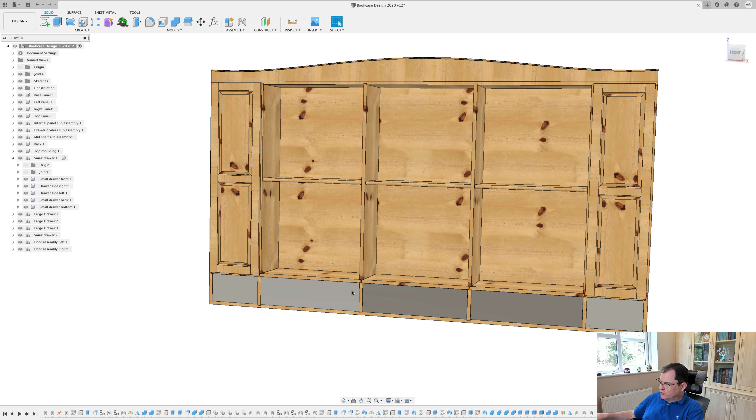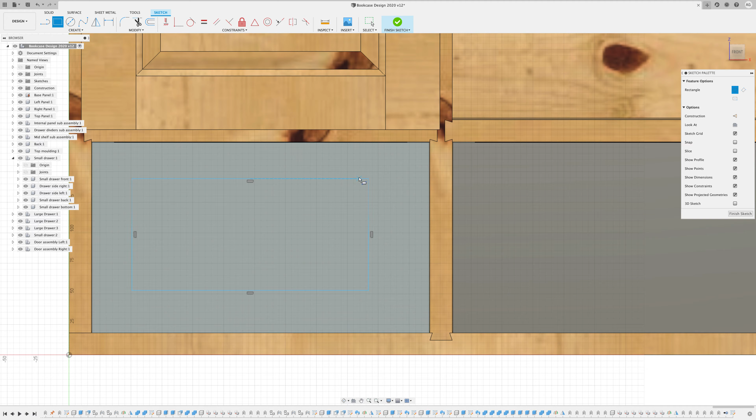So I just want to drop in a drawer front now. That's something we've done before, all the techniques we've certainly done before, so let's see how much you remember. I'm going to come into Sketch, click on the grey area, select a random rectangle, just draw any size like that, and now I want to constrain that to the edge. Now don't forget we put a very small gap around the edge of this drawer, and it's the actual panel on the carcass I want to snap into, not the grey drawer front.

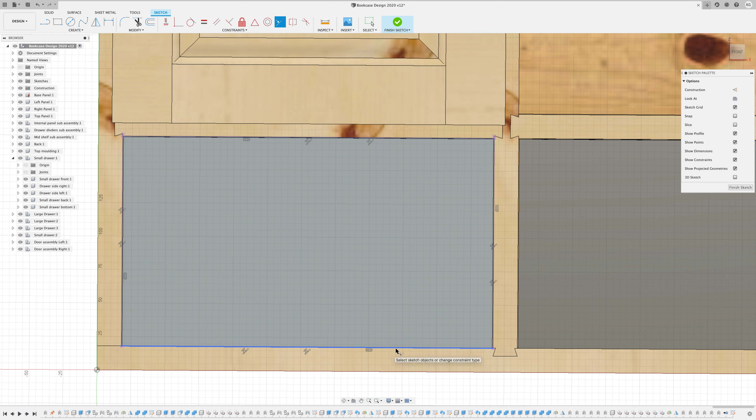Escape out of the sketch, out of the rectangle command, and now come into the constraint. Collinear constraint as always. Take the top edge and take it down to the edge of the carcass. Careful you don't pick up the drawer by mistake. The edge of the carcass there. Left side to the left hand edge of the carcass there. Right hand side to the right hand side of the carcass there. The base to the base of the carcass. Finish the sketch. We now extrude that to make it the right thickness.

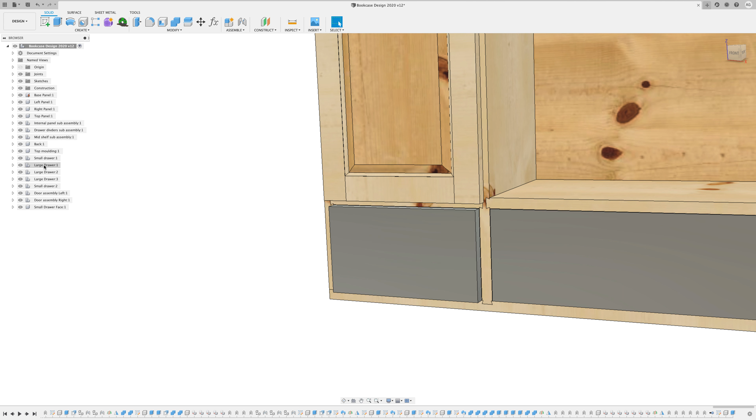So into the extrude tool, click on the front, and drag it out, and we want it to come out by stock thickness. We want to make sure we make a new component there, and let's call this component small drawer face, I think would be good. Let's just check we've not used that name. No, we call it front, so we'll call it small drawer face.

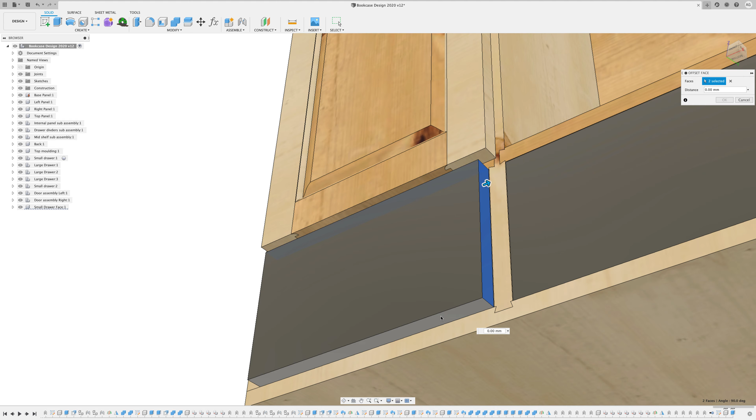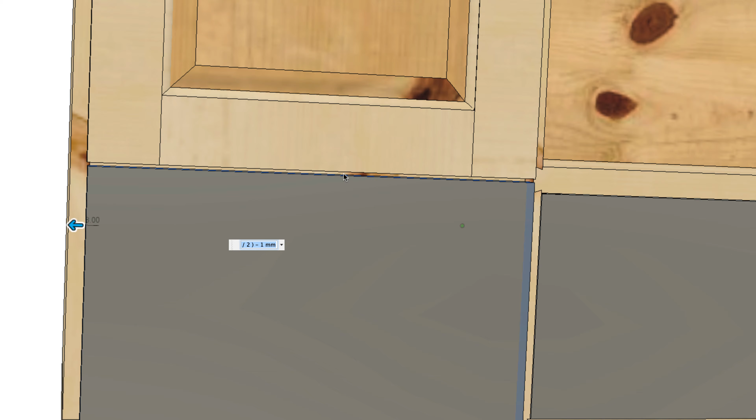Cool. And now we just need to make it the right size. So we need to offset the edges, modify tool, offset faces, and we want this top face, this right hand face, this bottom face, and this left face. And we're going to extrude that out by stock thickness divided by 2 minus 1 millimeter. That's the same command we used on the cupboard door, and you can see that now lines up, but it gives me that nice 2 millimeter gap between the drawer front or the drawer face and the cupboard door, which is what we want.

Now that's obviously not glued onto anything, I can just waggle that round, so we need to glue this to the front of that drawer, so just revert to that position, put it back where it was. Pick up the move tool, move or copy, click on the drawer and just slide that out of the way so we can get some glue behind it.

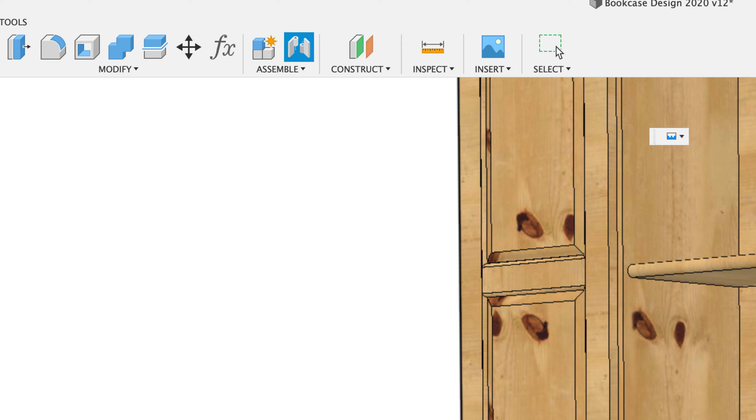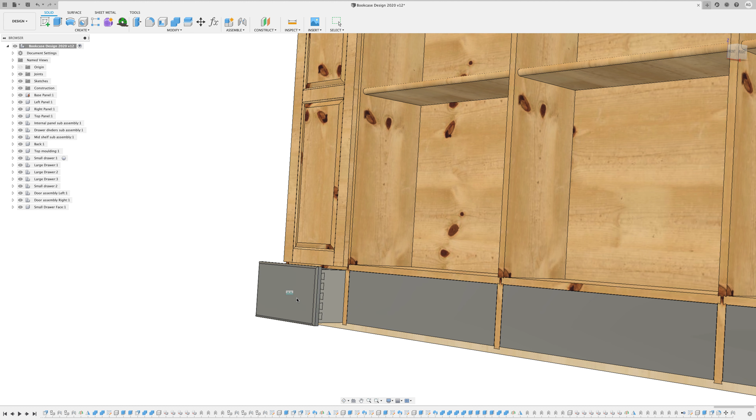Okay. We're going to use a joint assembly to glue things together exactly as we did in the drawers to begin with. So assemble, joint. Now I want to come to the back of this drawer and pick up that back face and the center point of that back face, and I want to glue it to the center point of this drawer sub-assembly. Bang, that will move it into place. I love that. Okay, so that drawer front is now attached to my drawer, so when I drag my drawer front, that drawer slides in and out.

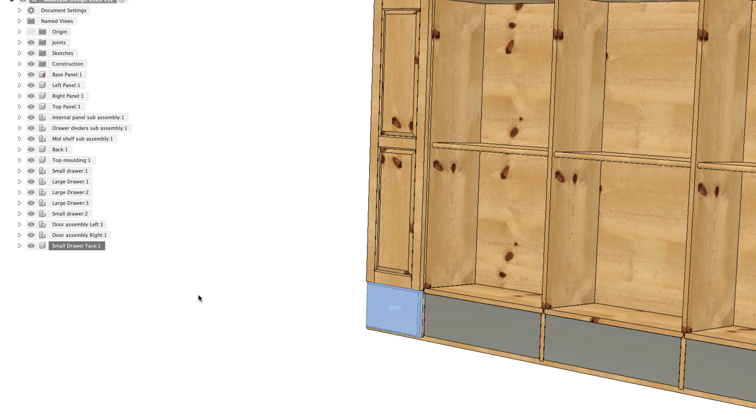Select, position, revert. Okay, so with that done, we can now just copy that over to this side, right click on the small drawer face, copy, right click into white space and just paste new, and that will paste a new drawer face over the old one. I can just move that over here now so it's out of the way. Okay, and now I can glue that into place as well. Assemble, joint.

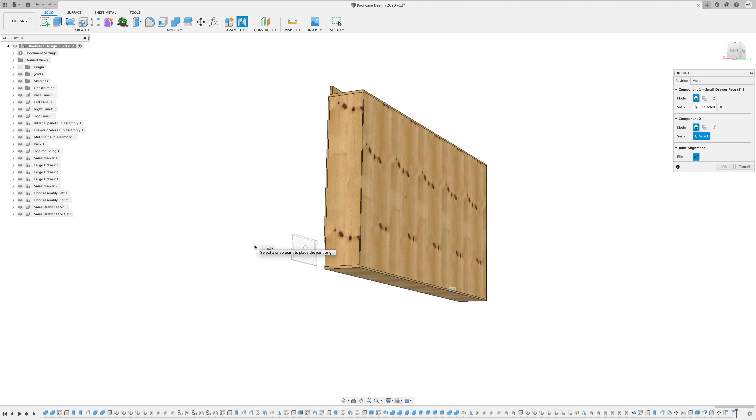It'll tell me I've moved it because I've just moved that panel, so I'll capture that position for now. I want to glue the middle of the back of that panel to the middle of that drawer, into place, shake around, job's good.

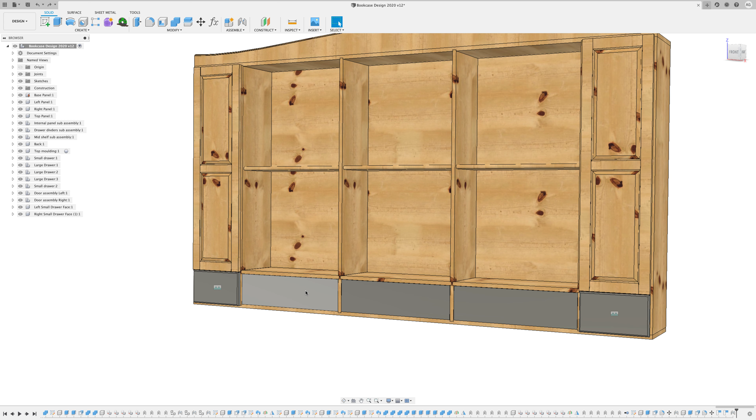So we've now got our two small drawer fronts in place. Now it all seems like a lot of work when you're watching somebody else explain it, but this is quite a quick process. I'm just going to go through this the way I normally would, and you can see what I mean. Sketch, click on the drawer front.

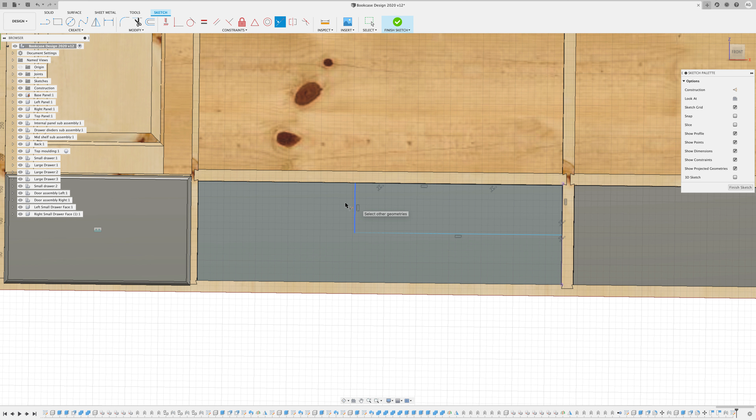Rectangle, random rectangle, zoom in, collinear constraint, top line, top edge, right line, right edge, left line, left edge, bottom, bottom, finish the sketch, extrude, bring that forward, stop, thickness.

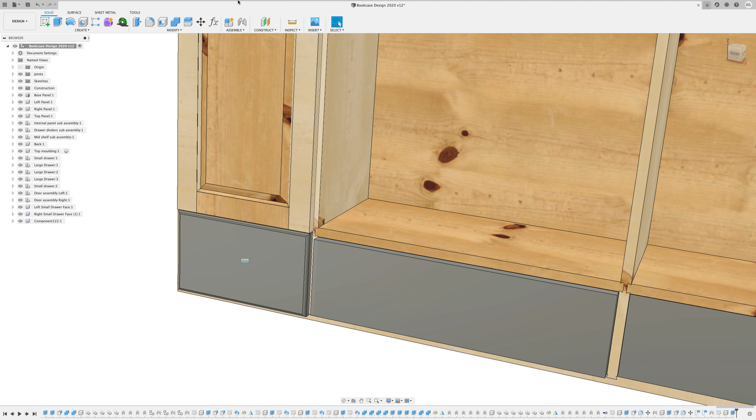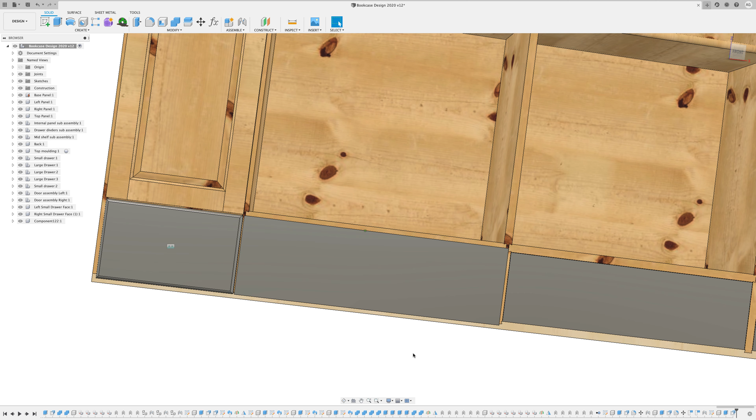Make it a new component. Okay, that's now made a new component on there. Now I just want to put the offset in, modify, offset, that one, that one, that one, that one. I'm going to offset by stock thickness minus 1. Okay, and that's now put in place my drawer front, fillet, front edge, drag it in, joinery, done.

Okay, so I've now got my large drawer front, and that took about 30 or 40 seconds. Give this a name, let's call this large drawer front.

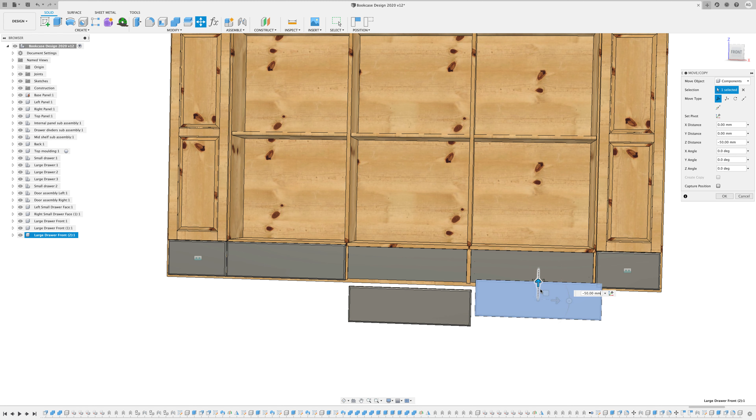Right click, copy, right click, paste new, paste that out of the way, down to there. Okay, right click, paste new, paste that one to there, drag it out of the way. Okay, take the original one, move that out of the way.

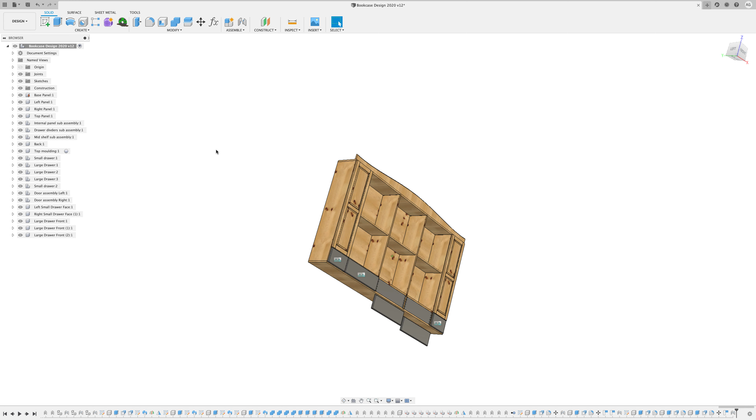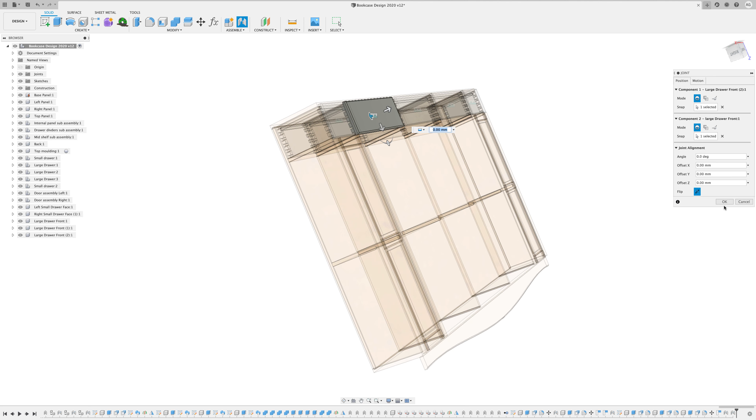Okay, come into the assemble command, joint, capture the positions, click that one to there. Okay, right click, repeat joint, that one, come back to there. Okay, right click, repeat joint, that one to there. Okay, take it home, bang.

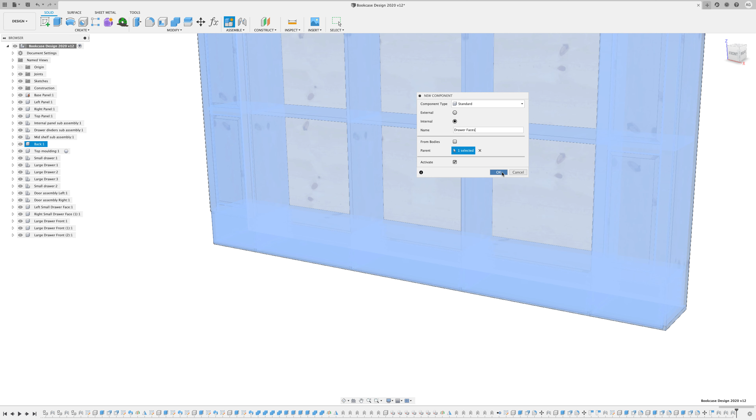So I've now got all of my drawer fronts done. I'm just going to create a new component here. I'm going to call this one drawer faces, because I probably want to work on those separately from the drawer. Okay, and then I want to take all those drawer faces.

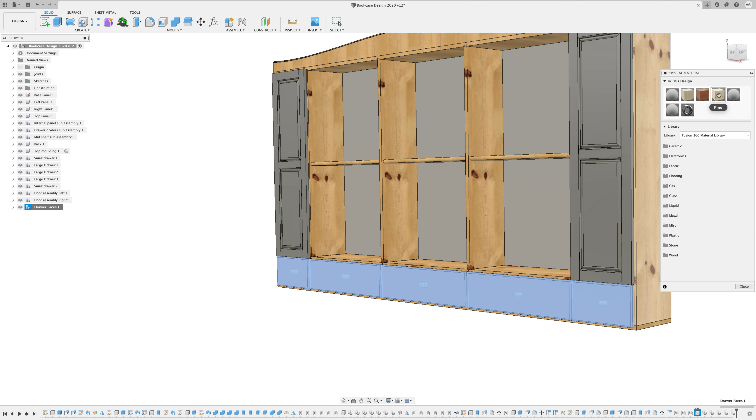Happy days, that's done. Now with that done, we just may as well create the appearance, so I can right click on drawer faces, go to the physical material, and just drag onto that component our pine. Close that down. So we've got our pine drawer fronts done now, as easy and as quick as that.

Now the thing I really want to get to today is introduce you to a new command, and that new command is create revolve. Revolve a sketch profile or planar face around a selected axis. So select a profile or planar face and select the axis to revolve around.

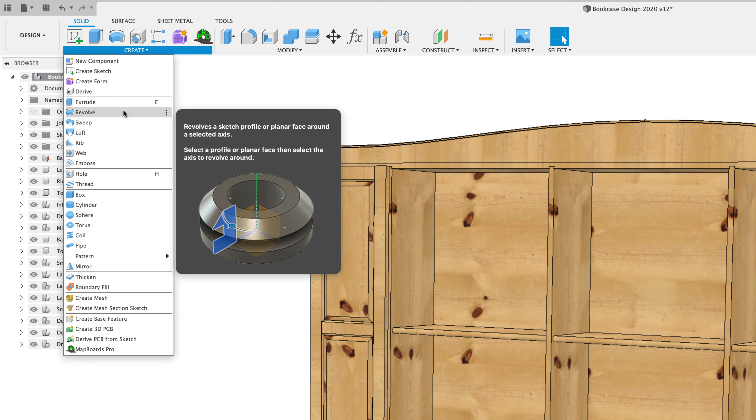And you can see in the example on the diagram, the blue area shows a profile that they drew and then revolved around to make that 3D shape. And that's exactly the technique we're going to use.

Now this is super useful, and if you want to create spheres or any 3D object that's sort of round, you can do that. And if you think about this profile, though I'm not going to model that perfectly, you can see the idea. If you were to sketch that profile out, you could then revolve it and that will give you that 3D shape. So let's look at a very simplistic version of this.

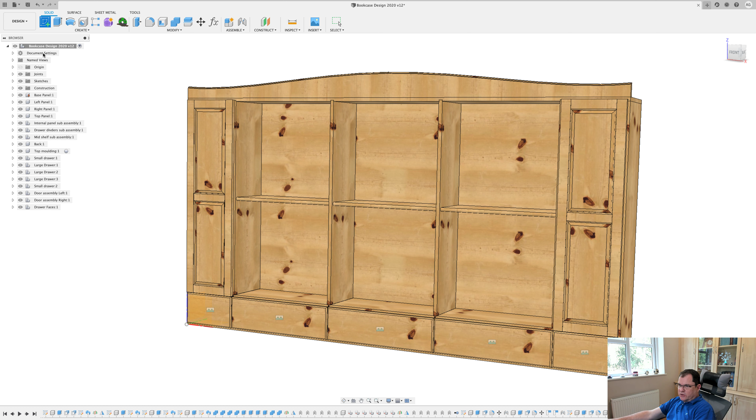We're going to start by creating a sketch. Now I want to create the sketch on this edge plane here, so we're just going to do that. I don't really care about these drawers or anything, I'm just going to sketch anything over here in free space. And I only want to sketch half of the diagram. So I'm going to sketch first of all some sort of back profile like that.

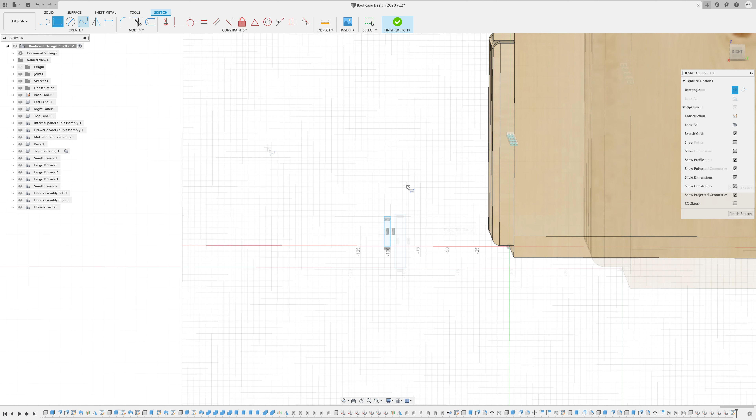So I want to create a little bit of a curve on this front edge, so we're going to use the fit point spline tool. We've used that before. Here's a tip: if you just hover on any of these lines on the rectangle you've drawn, don't click, just hover over it so it snaps in.

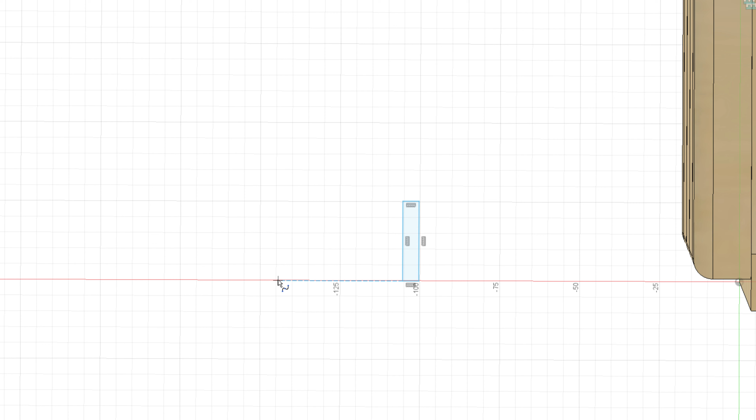You'll see you get that blue dotted line that will make sure you stay parallel to that surface. About there's good, so click once, hover over the top, then come out to about there, and then just bring your cursor down, and click on that tick, and that gives you a straight line. Escape to come out of the tool.

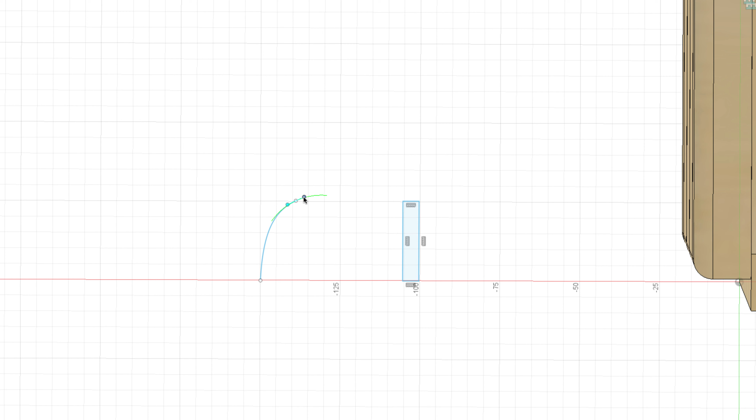Now you can just simply grab these green handles, and I can now make some sort of nice pattern on this. I think probably something like that. Now remember, you're drawing half a model here, so this edge parallel to this edge will look best. Otherwise, if you do something like that, you get a dimple in the middle, which you may want, but I want that to be parallel.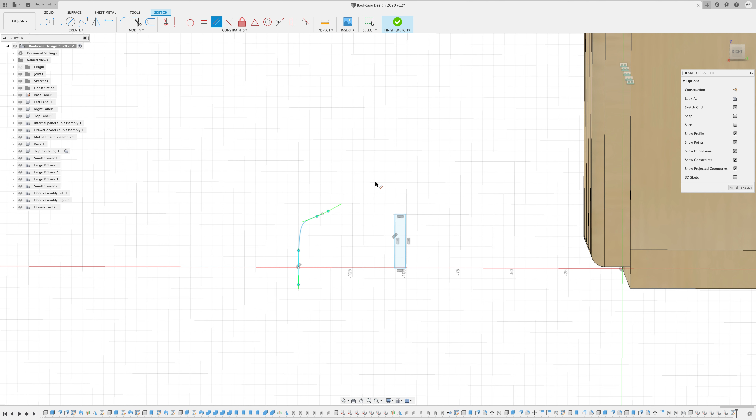So I'm going to constrain that blue line with this. Into my constrain commands, parallel, that blue stick with that, so that will lock that in to be parallel. Escape my constraint, and now I can just wander around with this edge to give me something I like.

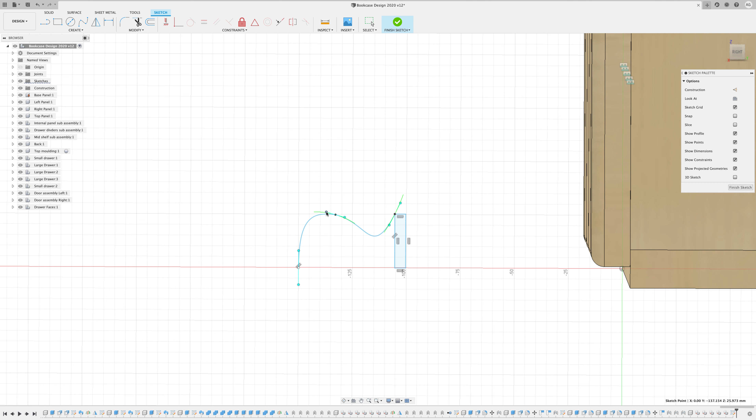And that might look pretty good, so escape, and now another fit point spline from that point to that point. Click on the tick, and now again I can use those little green balls, and I can just create something like that. Not too bad. Flatten that line out a little bit. Oh, I like that. So there you go, I've now got the basic shape of my handle.

Just going to come in with a line from that point there to that point there, and that just completes my sketch. Let's get some measurements on this.

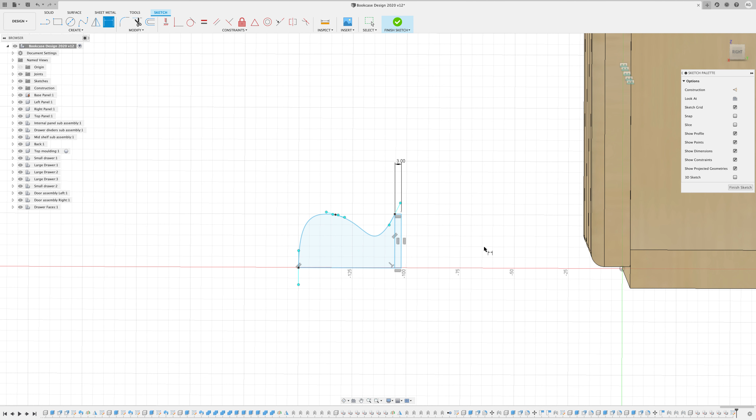So let's look at this little line here, let's make that line 3 millimeters. Let's look at that point to that point there, the middle of that curve to that point, and let's make that 15 millimeters. And then that point there to that point there, let's make that 8 millimeters.

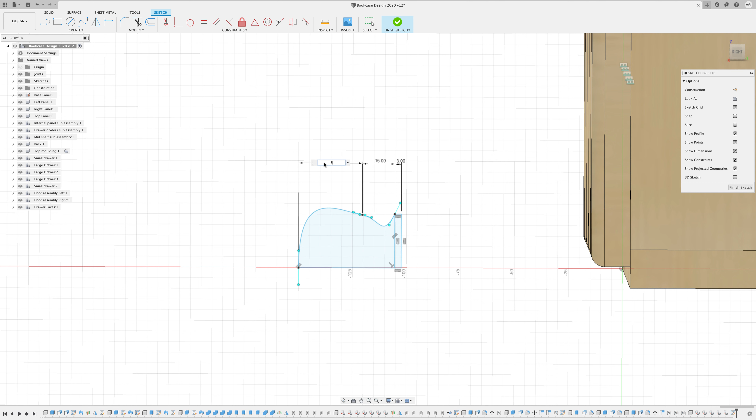Do I still like that? Let me see, escape. Probably going to make that a little bit more curved. That's good. And that one a bit more curved as well.

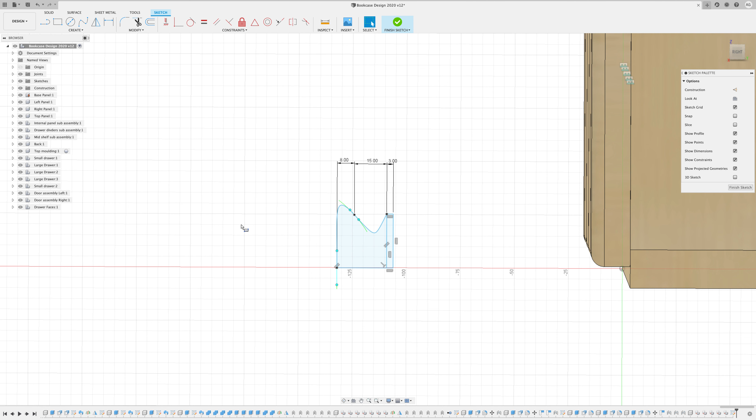Okay, that's good. And then I'm just going to finally come in with a small raised portion here at the front. I like that. I just want to curve this off a little bit, so we'll come in with the fillet tool onto that point. Turn that, that gives me quite a nice little profile there.

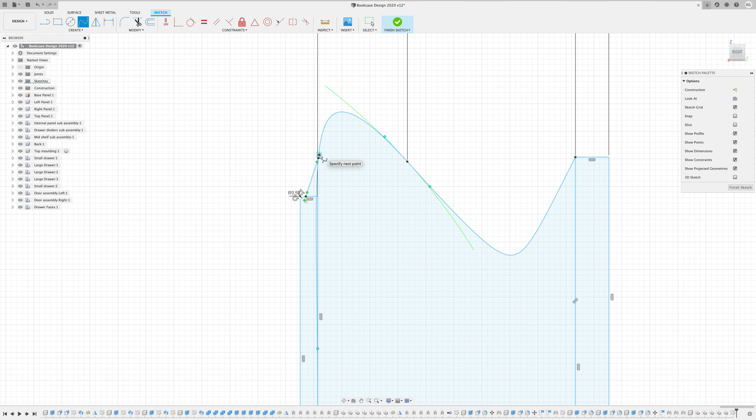And I now want to just soften off this curve here, so once again I'll come in with the spline tool and just curve off that edge ever so slightly to that. Okay, so I've got something that's reasonably okay, I think. Finish that sketch. So you now see I've got some sort of weird and wonderful shape.

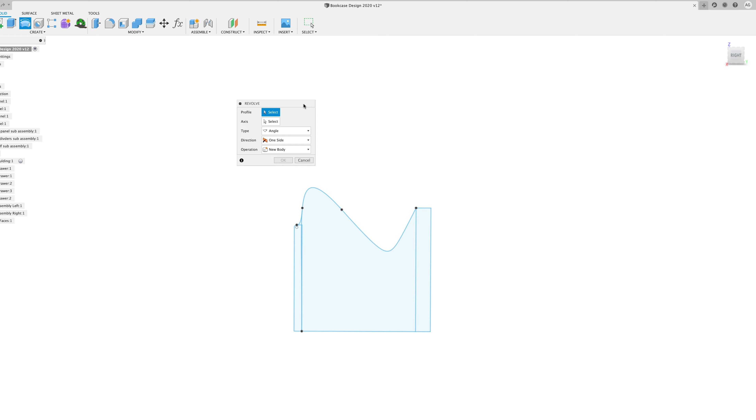It's probably good enough for what we want to use it for. So come in with the create tool, and I'll come down to revolve. Here's your menu, should be quite simple. What profile do you want? Well, I want that, and that random sketch that we've just made.

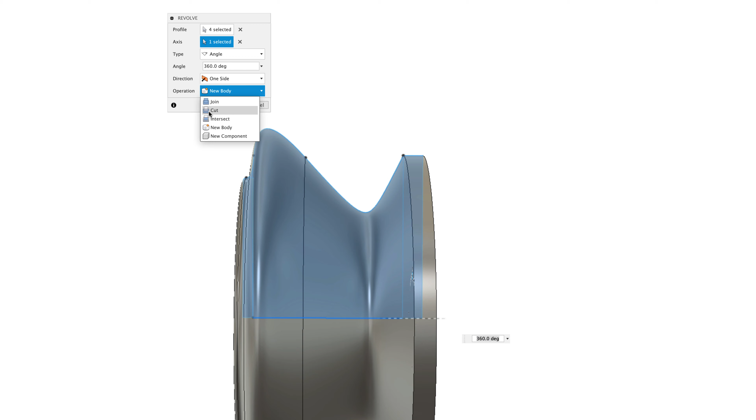The axis, well, I want to rotate around this endpoint here, around the center. Fine. And then direction one-sided, 360 degrees all the way around, and I want to make that a new component. Okay, and that now gives me, not the world's prettiest, but it gives me a drawer pull. Super, super, super simple.

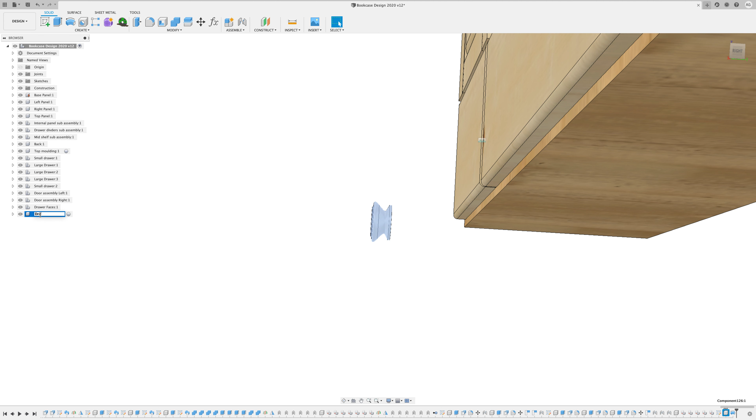Let's give it a name. Let's call that drawer pull. And obviously you could take your time and make it pretty.

Let's give it a material. Let's make that, actually, why don't we make that a shiny steel colour? That'd be nice, wouldn't it? Let's make it a shiny steel colour. And close that down. That might just be quite interesting.

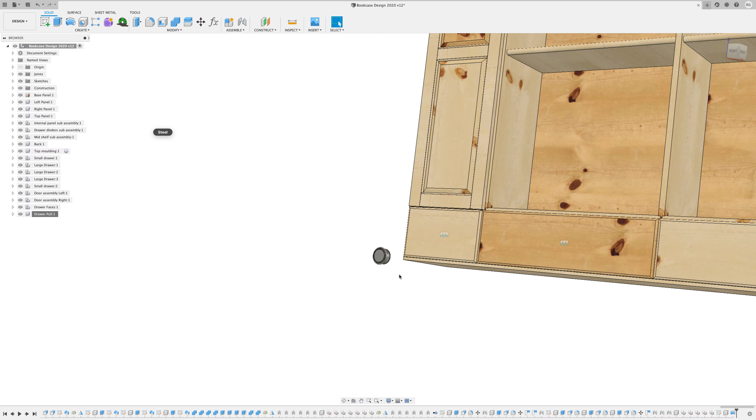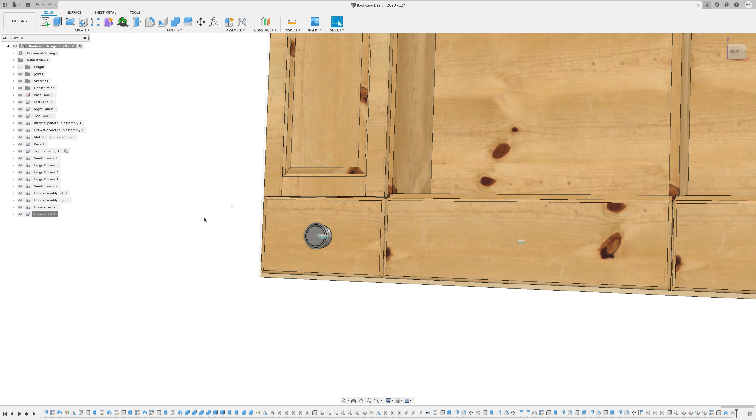And now I want to glue it to my surface. Joint, the midpoint at the back, and we'll glue that one to the midpoint of the front. Okay, so now I have quite a nice shiny surface. I'm just going to turn off these little joint lines that annoy me as always. So let's come up here and just turn off those. Don't delete them because your glue will break, but there you go. So cool, I don't dislike that, that's okay.

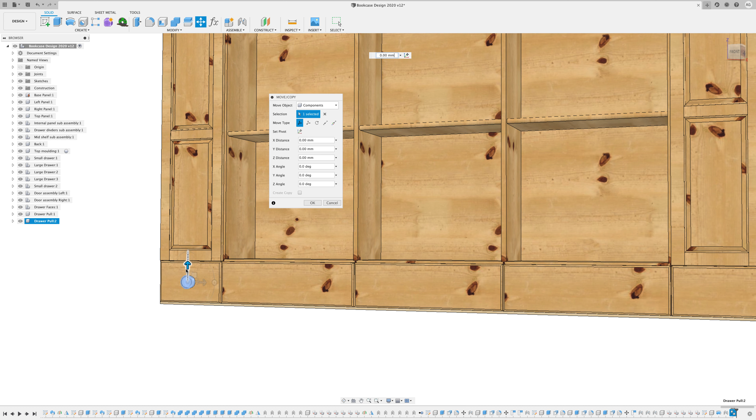So now we just need to copy one onto each drawer. Right click, copy. This time I'm just going to paste it, I don't want a new one. Let's just drag that out of the way. Okay, now let's just paste, repeat paste, and just drag that one out of the way, somewhere over there.

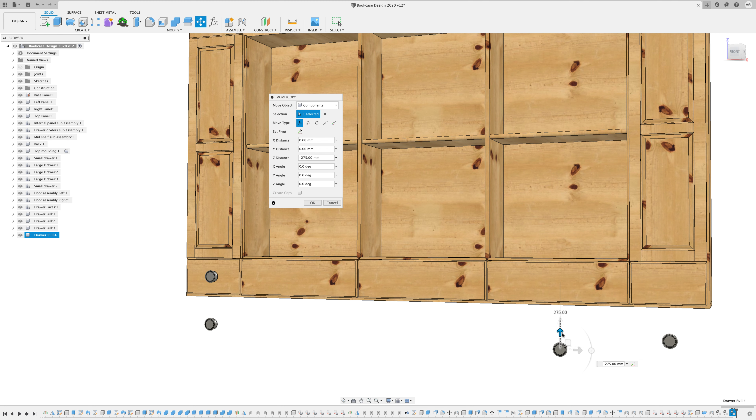Repeat paste, have one for that drawer there. Okay, and repeat paste, and we'll have this one over here. Okay, now I can glue these into place.

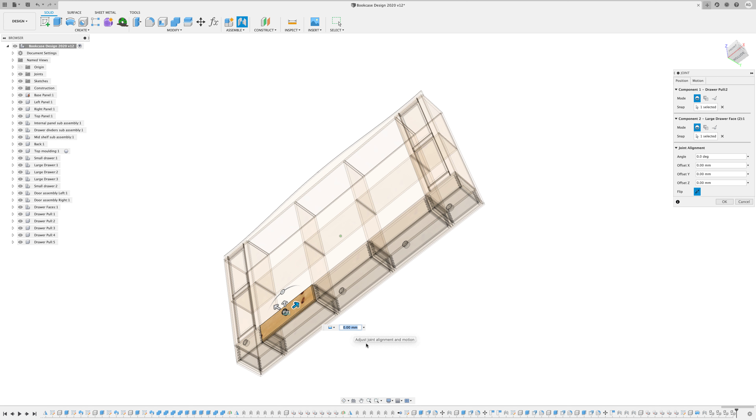Joint command. Pick up the back of that one, we'll put that there. Okay. Repeat joint, back of that one, and we'll put that one on there.

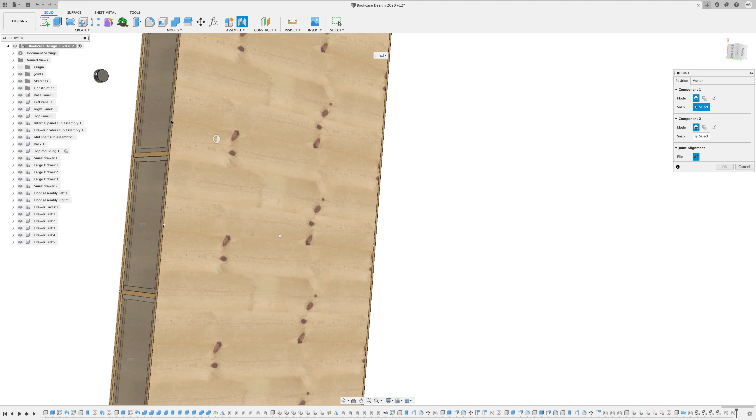Repeat joint, pick up the center of that one to the center of that panel there. Okay, and then finally repeat joint, and we'll pick up the center of that one and we'll drop that into there. Okay.

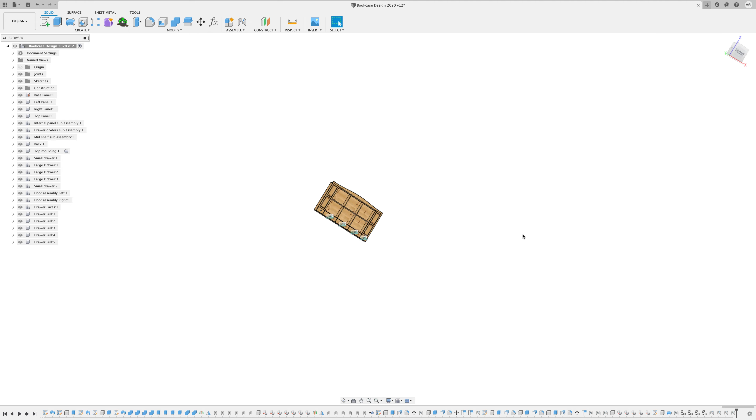Looking quite good, I think, isn't it? Let's just hide those joints that we just made.

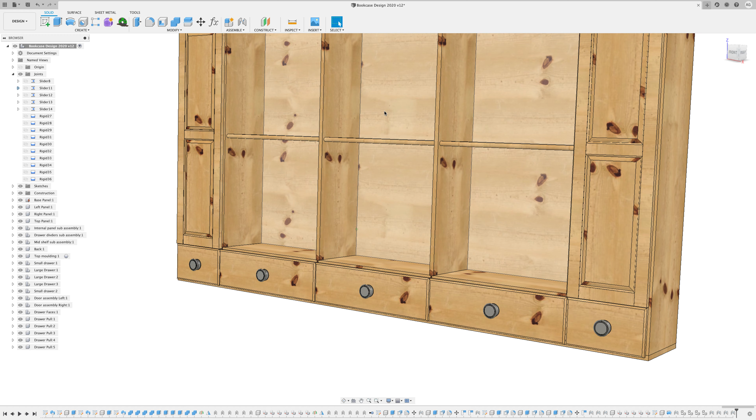Now you might be looking at this and saying, hold on a minute, I can see these lines on this where it's joined together. Remember in the last episode I turned on visible lines so I could see the edge of my unit. It was a command down here on the display settings, under visual style, and we selected shaded with visible edges only. If we go back to shaded, you can see it sort of blurs together, but it takes away those visible edges and you can see how that command works for you.

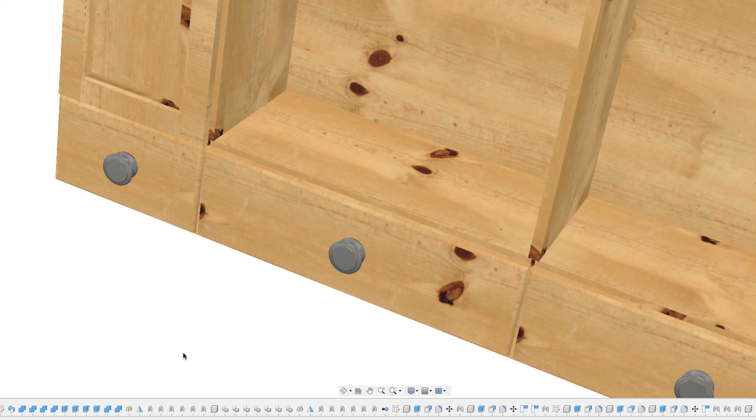So I like visible edges on because it makes it easier for me to work on the cabinet in 3D space. Now I want to put the same handle here. I'll paste, since that should still be in our paste memory, so paste again to get another instance of this, and just drag it out of the way.

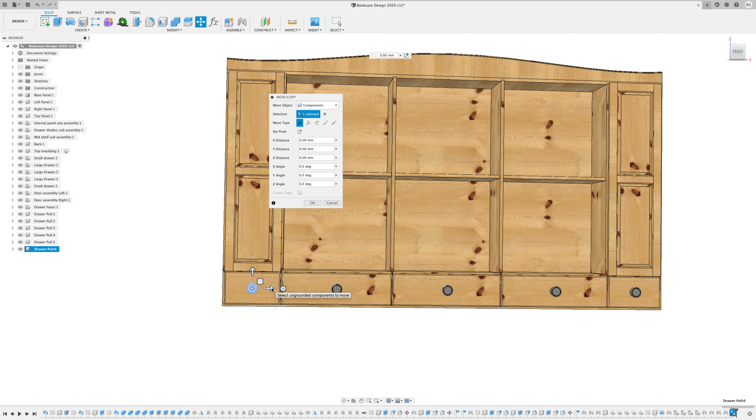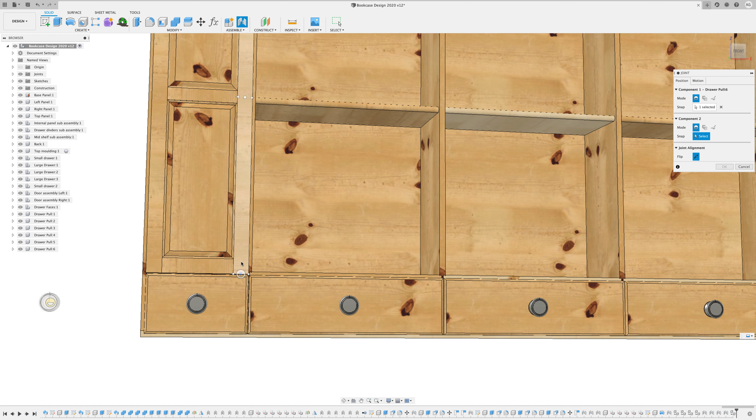Now when I come in to use my joint tool, I want to show you something. I can pick up the back there, but when I come to this area, look, there's nothing to actually snap into. It wants to snap into one of these points. Given the fact I want it sort of where my arrow is and not where it's snapped into, we need to create some sort of glue point. So cancel out of that command.

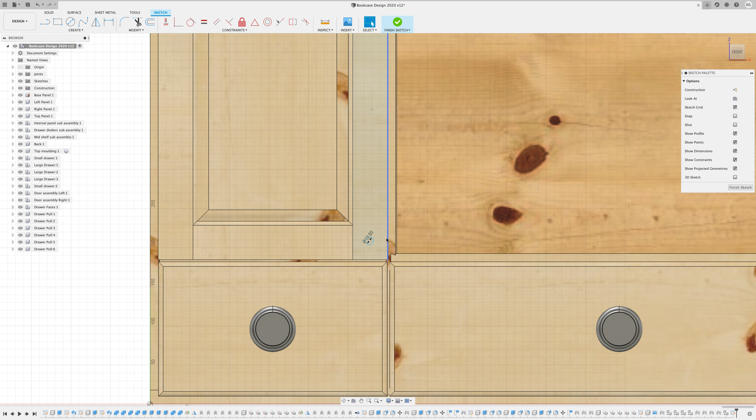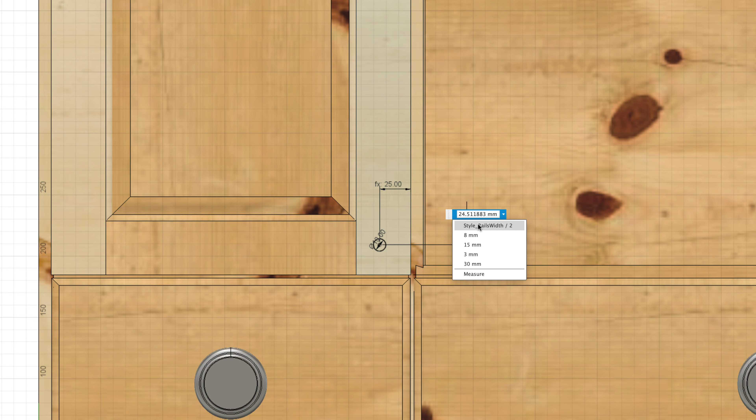The easiest way of doing it is to define a simple circle. So we come into sketch, click on that face, and create a simple circle, randomly drawn about there. Don't make it too big, so we'll make it 10 millimeters in diameter. Now I want to position it from this edge, coming from that edge to there, and it's going to be style rail width divided by 2. Then I'll constrain it from the bottom edge as well, also style rail width divided by 2, and that puts it in the right place for me.

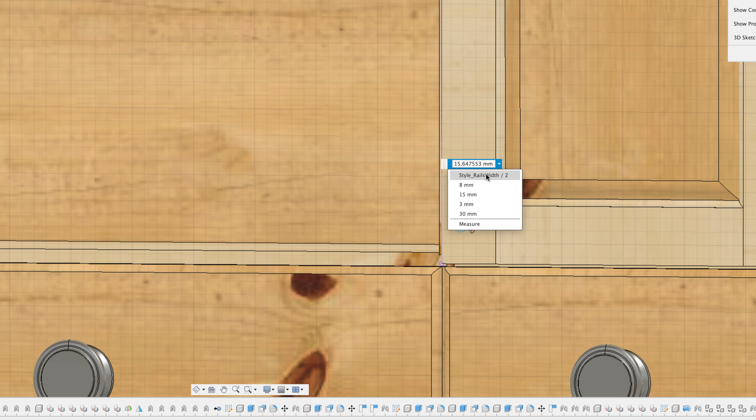I can put one on this door too. Small circle, anywhere you like, 10mm diameter or whatever, that's not important. From the centre to the edge is going to be style rail width divided by 2, and from the bottom, style rail width divided by 2. So that's now put that there in the centre of that place. Finish the sketch. So now I've got somewhere to snap my joint to.

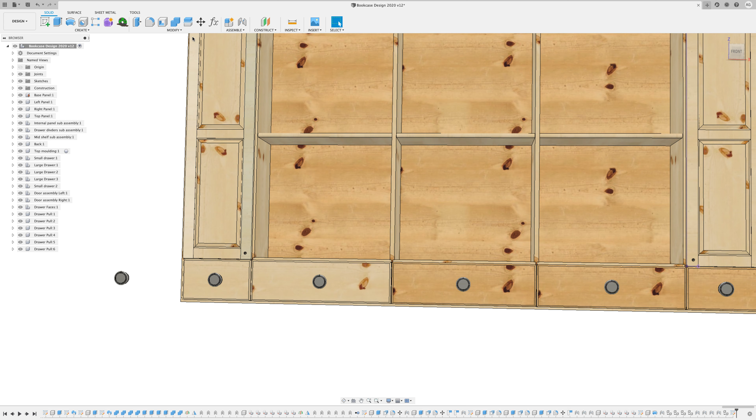So now I can come into my joint command. I can select the centre glue point of that, and now I can select the centre glue point there. Bang. Okay, so that's now put that into place.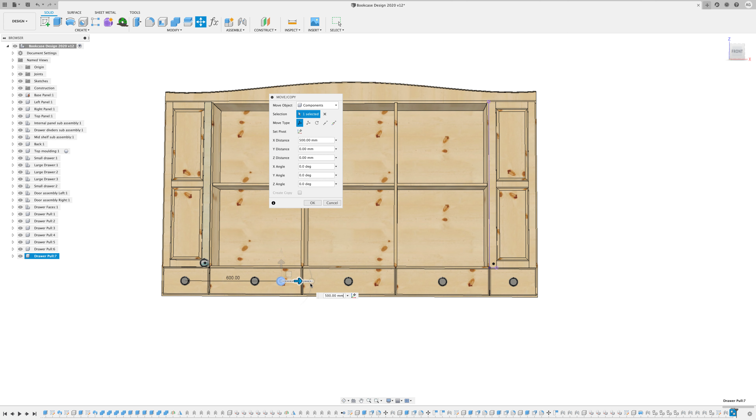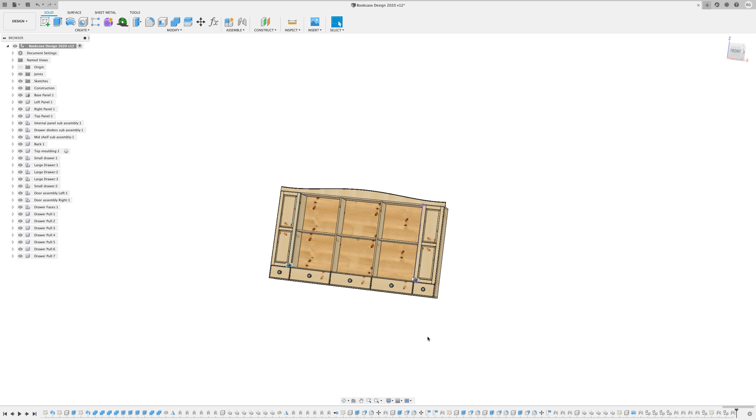I can paste another one, bring that one over here so it's out of the way. Now come back into the joint command, pick up the glue point on the back there, and pick up the glue point in the centre of that circle there. So there you have it. We now have, I'm just going to turn off those joint commands, I don't want to see the signs, I know I've joined it.

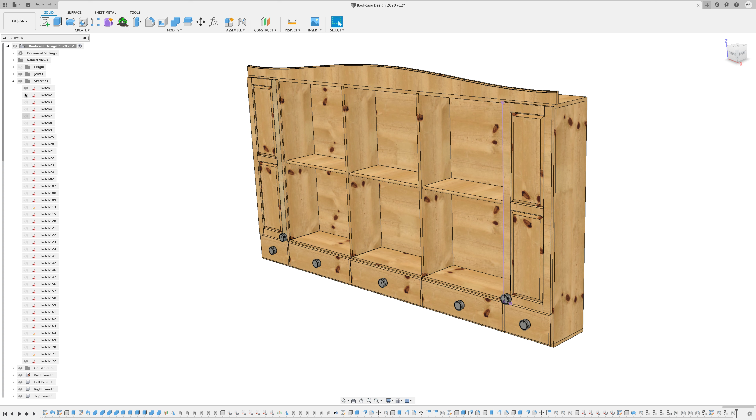Seems to have a sketch going on here as well. Just going to turn off the sketches, wherever they are. Yeah, that top sketch and that bottom sketch, just turn those off.

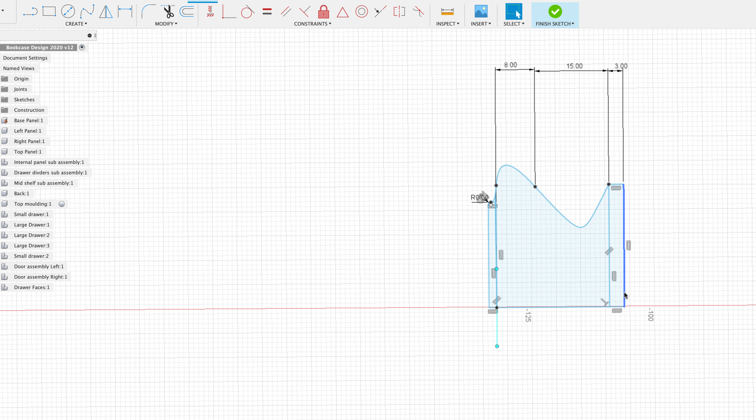So I don't actually like those knobs very much, they're too big. I'm going to come back into this sketch here that we did and edit it, which brings me back into this area. Remember that sketch we did? I'm going to further constrain this line here - that's currently 25, I'm going to make that about 50. And I think I can just drag this down as well a little bit to make that a bit nicer.

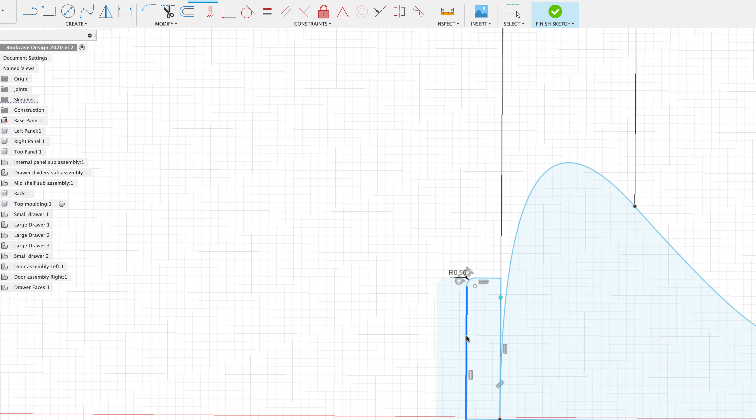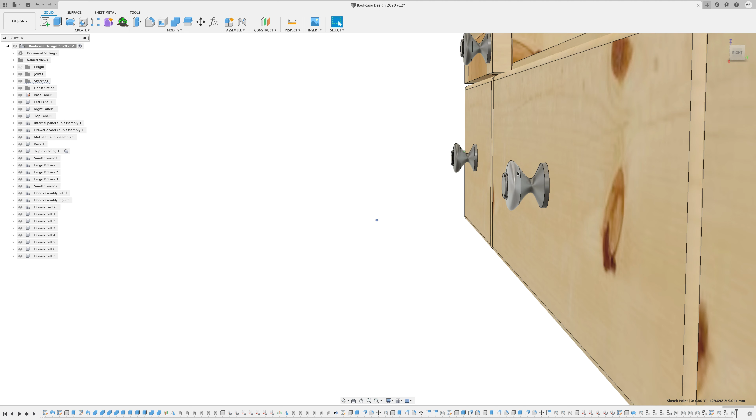That looks pretty good. Drag this blue line down so it doesn't look so stupid. I want to bring this in a bit as well, I think. I don't like that so much. Then I just want to fill this gap in, so I'll put a small curve out from there to there. Good, that's better. So that's now just resketched those and made them a slightly nicer, smaller design. I'm happy with that.

And that's once again the power of that timeline - you can design something, you don't like it, you can just change the sketch and it auto updates. So there you go, that's it. We've finished the design stage of our bookcase. Many of you will be pleased to know.

There's two big chunks of things we need to do though. The next episode I want to look at rendering and show you how I turn this 3D sketch into a photorealistic 3D picture that you can share with your customers, and I'll show you how that auto updates when you play around with parameters, really neat stuff. And then the final thing in the final episode is how do you turn the entire thing into workshop drawings and cut lists. Hope you find this useful, and I'll see you next time.